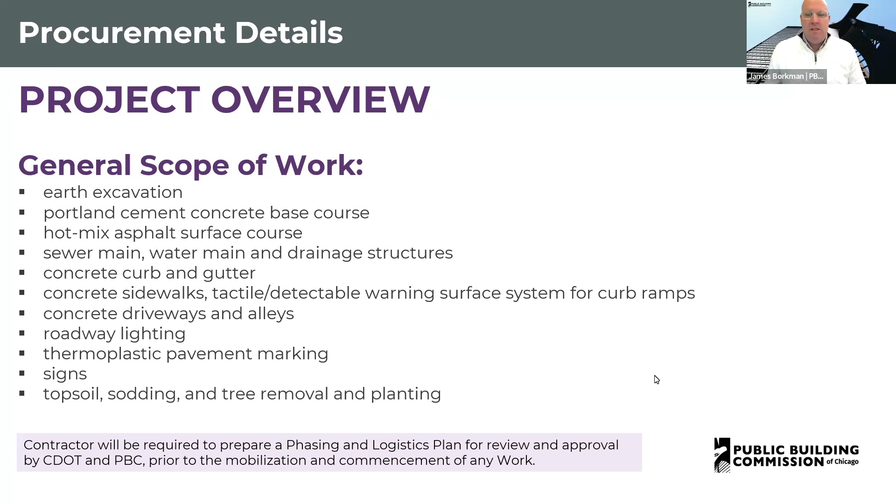As a reminder, and as noted in the information to bidders, our book 1, the contractor will be required to prepare a phasing and logistics plan for review and approval by CDOT and the PBC prior to any mobilization or commencement of the work. As we look at what the project overview entails, we have some time of completion requirements that you should be aware of.

This has 4 scheduled milestones and a substantial completion date. The substantial completion date is August 8th, 2025, with the scheduled milestones being as follows. Permitting and submittal prep, the milestone, a date of March 31st, 2025. Work may commence no sooner than February 11th, 2025.

Our scheduled milestone 2 for this project would be the mobilization and site control for Area A, which we'll go over in the tech review slides. You may not start work prior to March 24th, 2025, and work must be completed by March 28th, 2025.

Substantial completion, that's the overall completion of the project, not including the landscaping, as we'll see here momentarily, and the restoration. That's the associated work all the way from Narragansett to the west side of Mobile Avenue, which is better known as Area A. You'll start no sooner than April 1st, 2025, and complete by August 8th, 2025.

The third scheduled milestone will involve Area B. That's from Mobile to Melvina. You'll start no sooner than August 8th, 2025, and you absolutely will finish by November 30th, 2025. The final scheduled milestone is that landscaping I mentioned earlier. It'll be a fall planting schedule, so you'll start October 1st, 2025, and finish by that same November 30th, 2025 date.

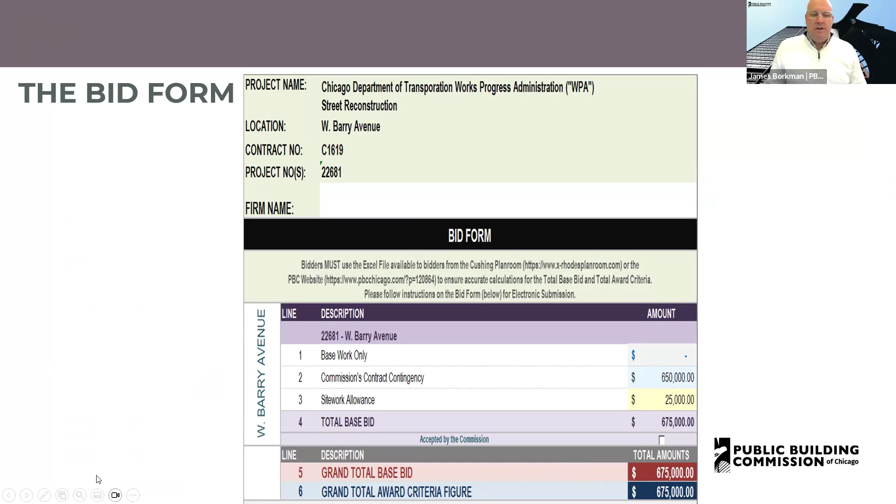You'll also need to enter your bidder's information on that sheet. This will then automatically populate back to this grand total award criteria, line 6. These sheets have been very effective for all of these projects.

We've had no issue with them, so I do not anticipate any issues for this project. The basis of award for this contract will be made to the lowest responsible bidder, submitting the lowest grand total award criteria figure. It's line 6, whose corresponding grand total base bid, which was line 5, is within the available funds and is otherwise responsive to all requirements of the CDs.

You're required to fill out the entire bid form to be considered responsive. And we remind you that we reserve the right to reject any bids wherever such rejection is in the best interest of the commission, and will automatically reject any materially unbalanced bids. I'm going to turn it over to compliance so they can highlight some key components of our contract here with Berry Avenue. Patrice, take it away.

Good morning, everyone. Again, this is Patrice Dahl, PBC Compliance, and for the Barry Street project, the MBE WBE goals are 26% MBE, 6% WBE. We only accept certification from City of Chicago or Cook County. They must be certified in the scope of work that they're performing. And for additional MBE WBE information, you can find it in Book 2, Article 23.

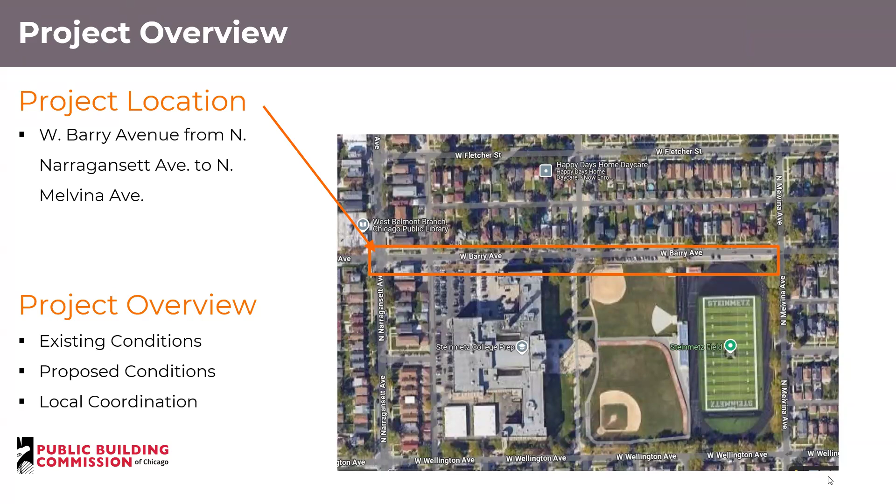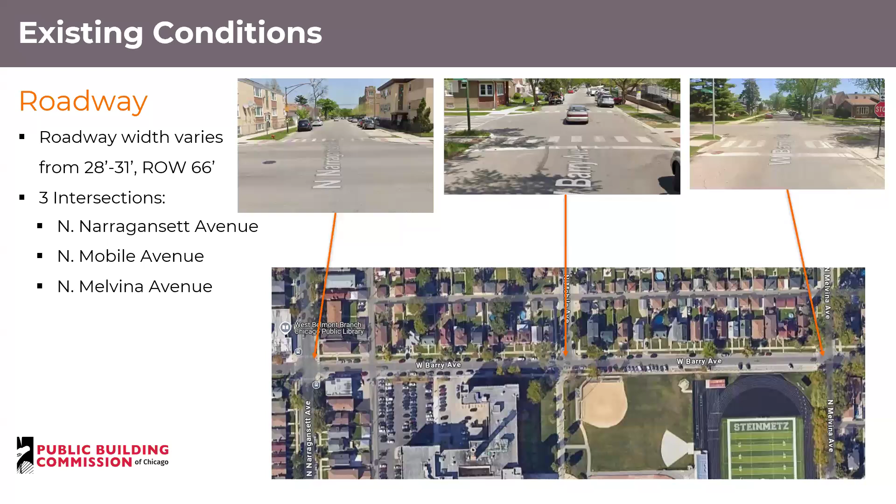As James mentioned earlier, our location is Barry Avenue from North Narragansett Avenue to North Melvina Avenue. We'll go over the existing conditions, the proposed conditions, and some local coordination items. Our roadway varies from 28 to 31 feet with 3 intersections in our scope and our project limits: Narragansett, Mobile, and Melvina.

Similar with most of our WPA projects, the pavement condition is typically not great on these. Additionally, there is no curb and gutter on either side. For some of the end treatments, there's a school, Steinmetz College Prep, I believe. It's on the south side of Barry, and there's available parking, and these vehicles exit with no curb or carriage walk on that one side. So in winter conditions, it could be somewhat hazardous if you can't see where you're stopping, as well as some flooding at low points along the roadway.

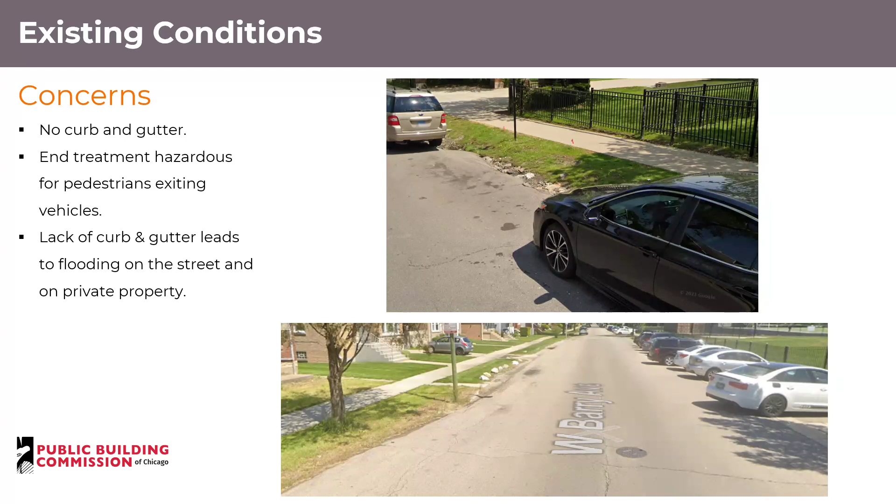Our typical civil plan includes removal and replacement of all the driveway and alley aprons, and this will have normal crown with drainage structures on both sides, and the legend over there covers a number of our proposed items. The normal crown on this roadway varies from about 1.4 to 4%.

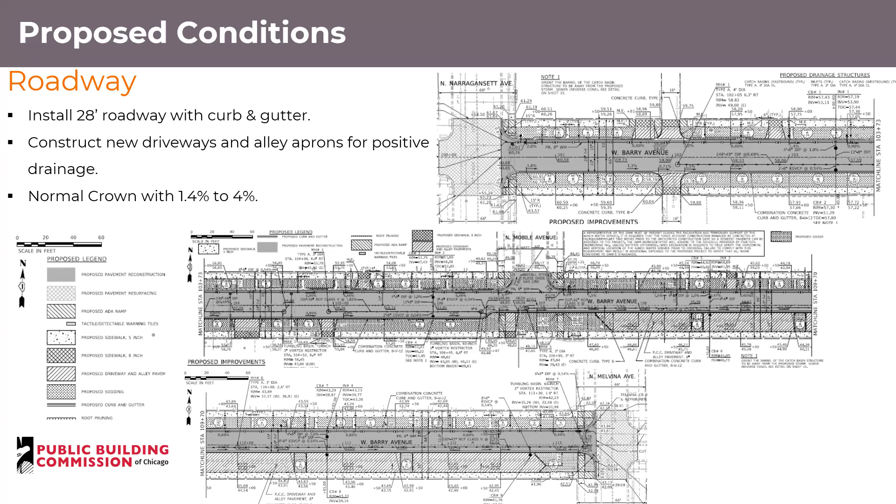On this project towards Melvina, we have a concrete curb delineated enclave where we will use 4-inch white striping to stripe out angle parking stalls. We have a pavement marking and signage plan that shows all the different details and dimensions for this, and at the intersections, with the school being nearby, we will be using the 24-inch continental striping at all 3.

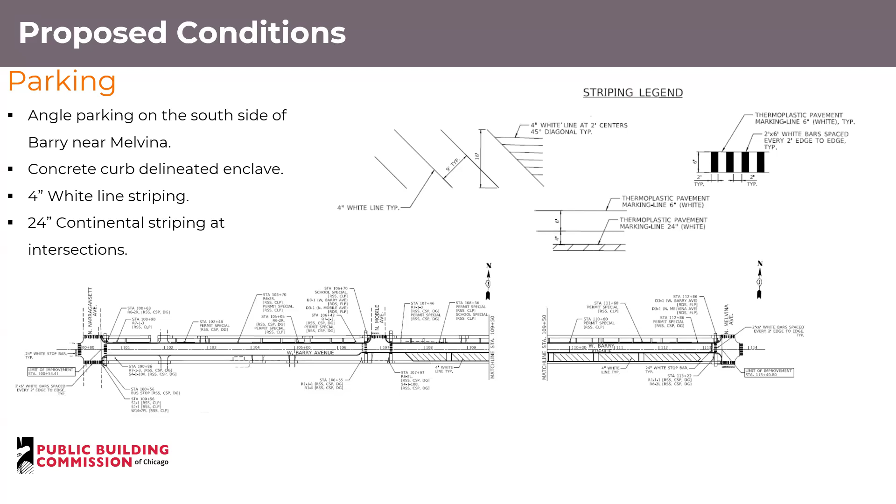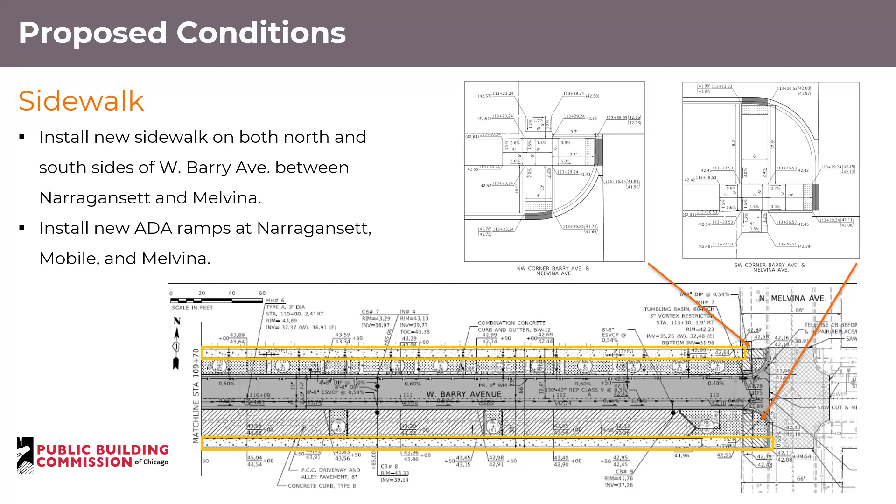This project will have a full sidewalk and carriage walk replacement on both sides. We do have ADA ramps at both the intersections of Narragansett and Melvina. At the limits we'll have full depth pavement for the curb line extended, and then resurfacing in the intersection, so we'll only be doing half of the ramps. We'll be doing the 2 on the west side of Melvina and the 2 on the east side of Narragansett, which is not shown in this slide, as well as the 4 ramps at Mobile.

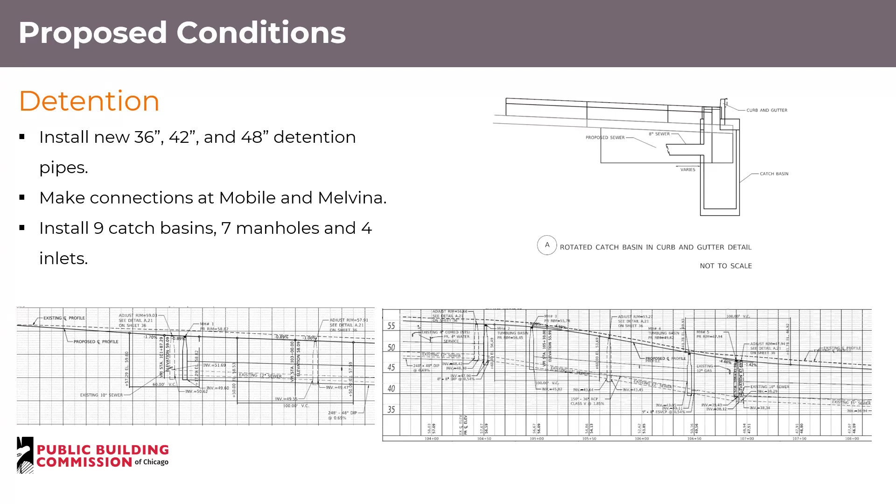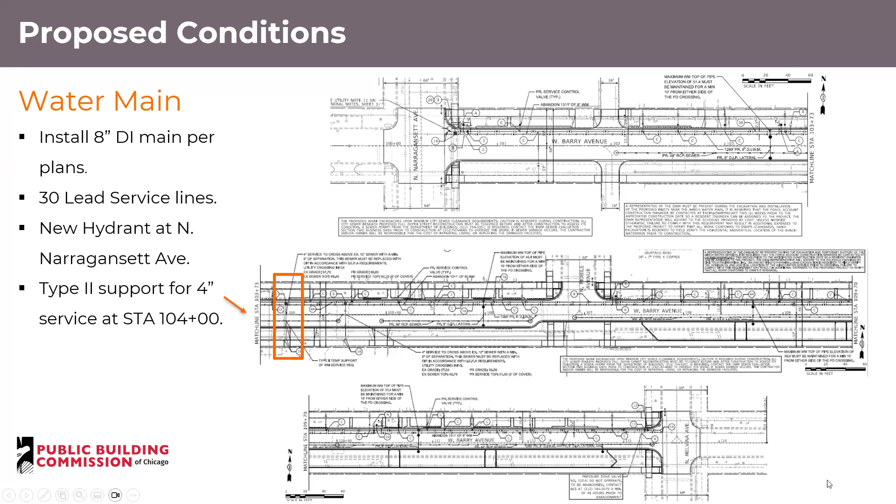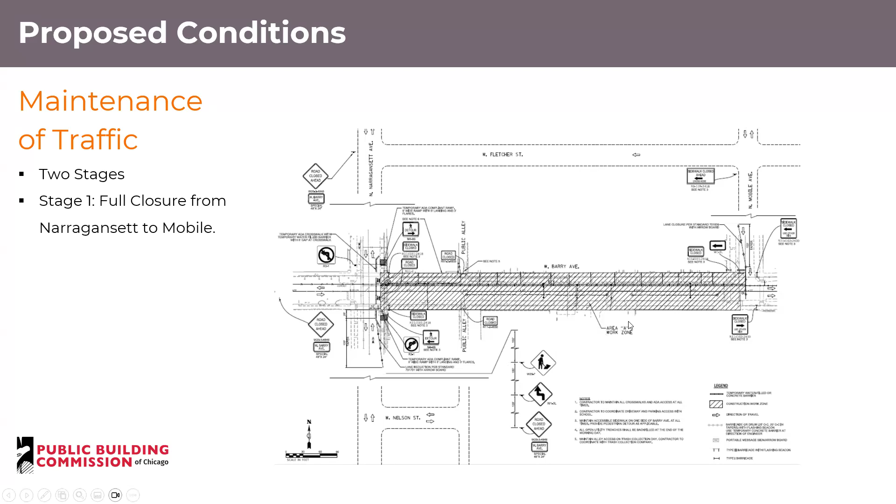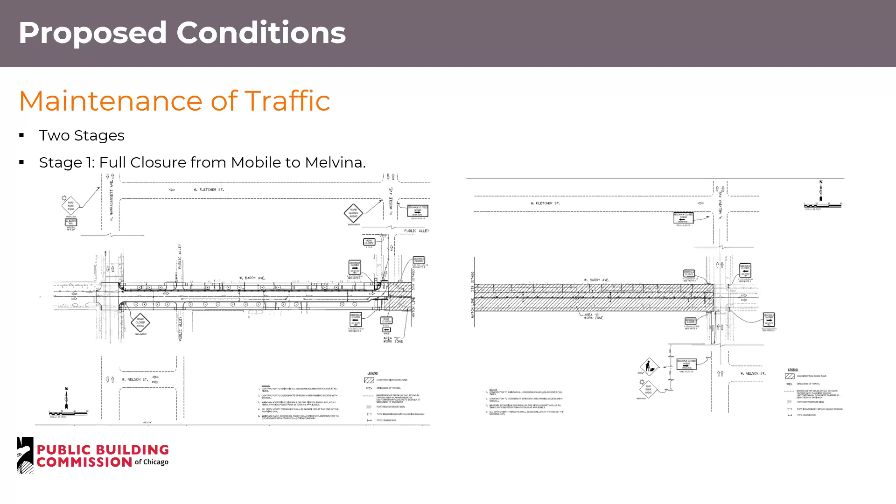Our maintenance of traffic plan. I know James mentioned area work zones A and B earlier, and the requirements. We'll have 2 stages. Stage 1 will be a full closure from Narragansett to Mobile. This will be highlighted as area A, and that'll be the work zone within those limits. Our second stage will close the other half from Mobile to Melvina. This will be area B, and it will detour the traffic around. That will be a full closure that'll give the contractor safety to operate and do all the underground utility work necessary for this contract.

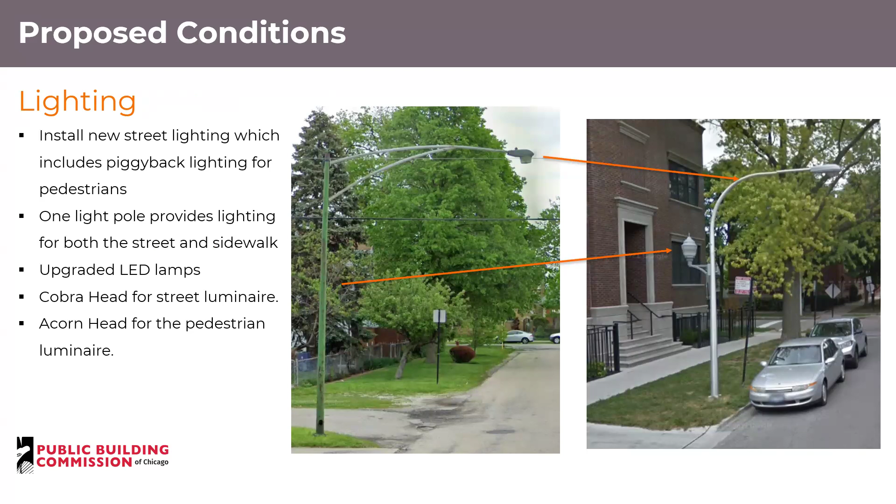Lighting. Typical, as consistent with our WPA design, is the Cobra Head and the Acorn luminaire. We'll have these staggered, I believe, up and down Barry Avenue.

Thank you, Tom. At this point, I am happy to open it up for any questions. The only question I have: is this a mandatory pre-bid? No, this is not, Jim. This is a non-mandatory pre-bid and tech review session. Okay, thank you. You're welcome. That was an easy question. Does anyone else have any questions? Preferably just as easy.

Okay. Well, this will conclude the pre-bid and tech review meeting for the Chicago Department of Transportation Works Progress Administration street reconstruction project located on Barry Avenue, contract C1619.